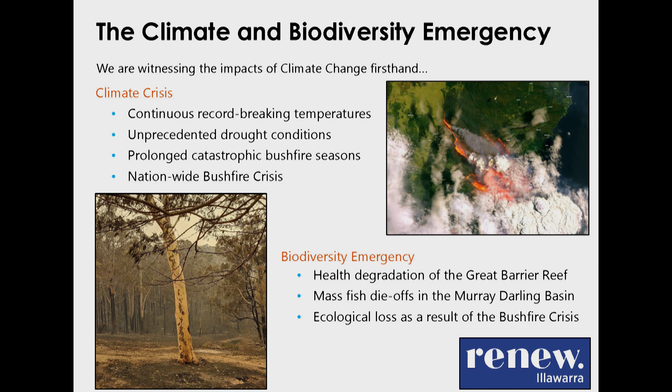So as I said before, last 6 months, a lot of bad stuff happened. Not the funnest recap, so I'm going to keep pushing forward. But the one thing that has come out of all this chaos and everything that's been happening, as I'm sure everybody in this room is well aware of, is the fact that we are getting action, and we're getting action from a ground-up approach.

And so this movement, or this action, or declaring of a climate emergency, is spurring this drive towards net zero carbon emissions and a drive towards a better environment. So it's really, really awesome.

So 92 city councils across Australia have joined in declaring a climate emergency. That statistic has probably changed since I put this down. It goes up a little bit every other week, which is really good.

So pretty much all the state capitals have declared except for Brisbane and Perth. So maybe somehow we can nudge them in the right direction. If anybody has, I doubt anybody's flown that far just to see me tonight, but if you are or know anybody from those states, just get them to push other people in the right direction, that'd be great.

So we've got carbon neutral Adelaide, we've got Sydney, which said let's go net zero emissions 2050, and then they just pushed that right up to date, which is really, really awesome. And a lot of other cities are saying 2050 is actually not good enough, let's do it now, or let's do it within the next year. Because that's the thing, we have the technology to do it now. We just need the driver and the motivation.

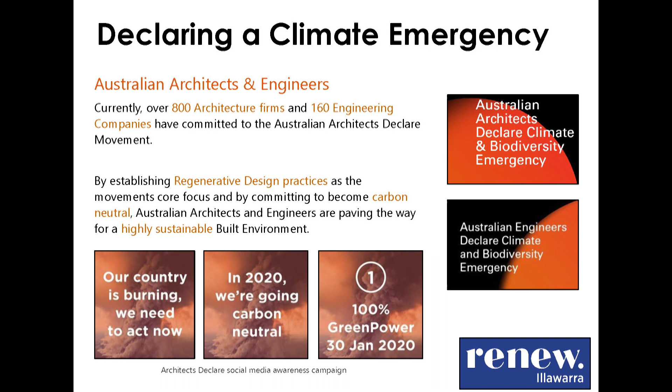Okay, so before we go down the road of telling you how to design your home to be carbon neutral, I think it's really important first that we break down carbon neutrality to understand what we're talking about tonight.

So when we're breaking down carbon emissions, there's a lot to unpack. It's a big umbrella: total carbon, embodied carbon, operational carbon. Operational carbon is what's produced from my actions - like this building right now, we're using energy that's a bit carbon-based, a little bit renewables-based, but mostly carbon-based electricity from the grid. But we also drive cars, we also like to fly and go on trips and stuff like that.

And then we have embodied energy. Embodied energy is what makes up the things around us, and the energy that goes into making those things. So within buildings, we're talking about construction and the embodied energy of construction and materials. This is another factor that, only in the last probably about 4 months, has seen more efficient methods of recognizing embodied energy within the built environment, how to calculate it - that's only just come to fruition.

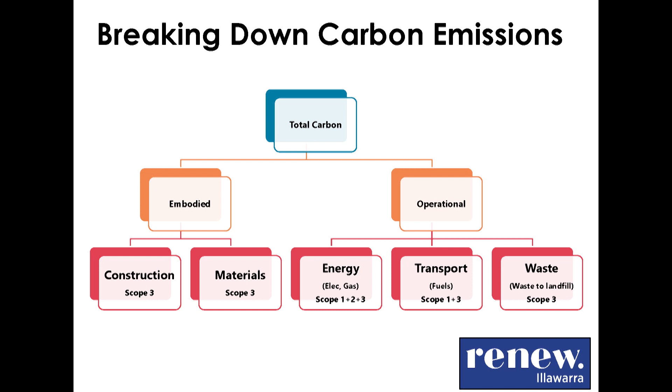So it's a really complicated process when you're designing a building to minimize your embodied carbon, or to calculate that. It is getting there, but operational energy is a lot easier to quantify. So those are under the umbrella construction and materials under embodied energy, and then energy, transport and waste under operational energy. Minimizing those things, or understanding how you can minimize them, is how you can become carbon neutral.

Don't want to get ahead of myself. So, breaking down carbon emissions - and I apologize, this one is a little bit commercial based, didn't have time to change it. So again, this is looking at the different scopes: you've got direct emissions, indirect emissions.

Indirect emissions come from embodied energy, from the things that go into building your home. If you're looking at glazing or insulation, concrete or wood, and all these other materials, they have different amounts of energy that goes into producing them. So we need to get away from materials that are produced with a lot of energy, and look at other items, like instead of concrete, hempcrete. I think building designer Dick Clarke talked about hempcrete here before, which is really good - it's a concrete that has lower embodied energy than normal concrete.

But also looking at the rise of using timber - timber in houses, but timber in tall buildings as well, which has lower embodied carbon than steel. So that's how we're looking at those embodied energies.

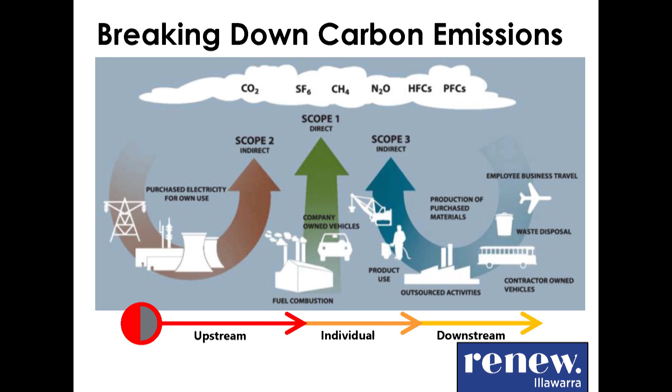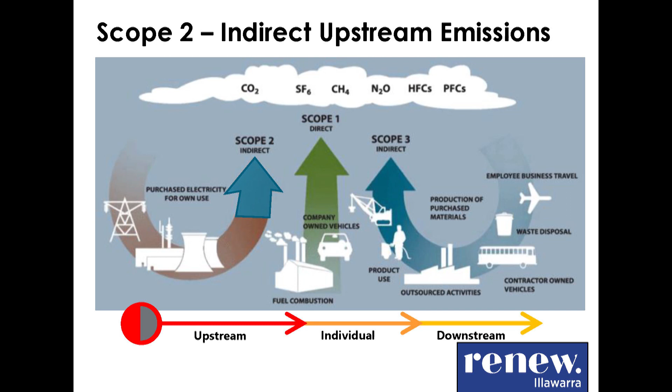But tonight, we're just going to be looking at scope 2, which is the indirect emissions that come from our grid, and how we can minimize our energy consumption from the grid to obviously become net zero carbon. But also then we're going to look past that and look at how we can generate our own electricity as well. And then through regenerative design, we're going to look at what happens once you've achieved carbon neutrality, what's beyond that.

So how can we achieve net zero carbon emissions? The first thing is measuring, then we want to reduce, then we want to offset. So we need to understand the quantity that we want to reduce our emissions to. We need to understand how to measure and quantify our electricity so we can reduce it. And once we've got it down to a realistic level, we then look at offsetting it.

So some buildings, like the Sustainable Building Research Centre, can produce all of its own electricity on site, so it doesn't need to offset. But if you've got a little home that doesn't have much space for solar PV on the roof, and you've got a large tree, or you're behind towards Mount Keira or something like that, and you've got a lot of overshadowing, you might have to offset. It's also, when we look at renting, or renters, the other way that we can become carbon neutral is through offsetting.

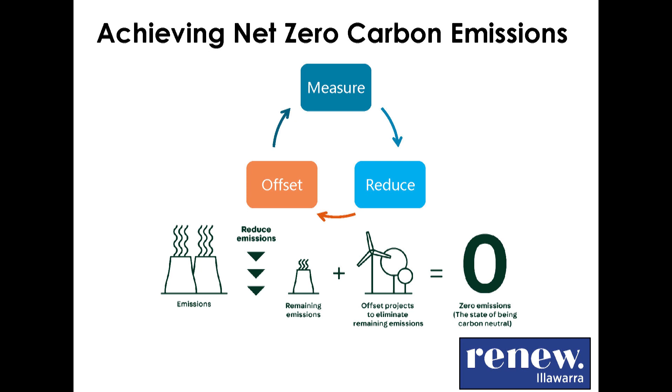And then we're looking at the core foundation of that when you're building a new home: the site. If you have the opportunity - it's very rare that some people have the opportunity to build or optimize their site - but understanding how you want to position your home, utilizing the shape and orientation of the site to facilitate passive cooling and heating. So that's obviously trying to look at ways to have your...

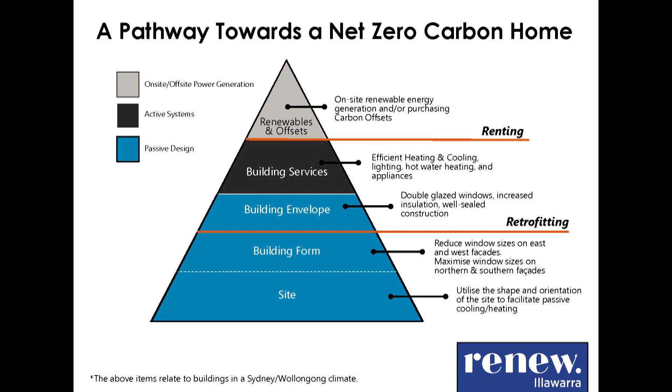So that's a pretty big overview. There's a lot more detail you can go into, but this is just a little bit more detail on what I was talking about before.

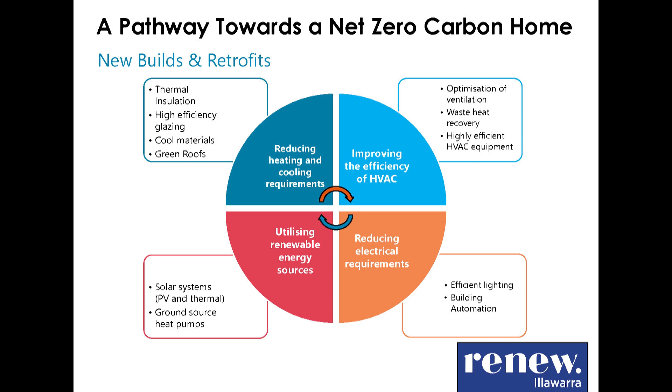As a homeowner and a renter, if you've done all the above and you're optimising your home the way you can, as we stated before, we can achieve carbon neutrality through minimising electricity consumption, advocating for installation of solar PV, etc. But the main thing you can do, and people are understanding this and more people are driving this, is moving away from places where you put your money that support coal-based infrastructure - moving away from energy providers that support the fossil fuel industry.

There's a couple of names there, dubbed the Dirty Three. Instead, move to an energy provider that acknowledges and supports climate change action, looks at community energy programs, and has sustainable carbon offsetting programs like reforestry and investing in solar farms.

So the two main ones there are PowerShop and Enova Energy. PowerShop's a bit of a bigger guy, New Zealand based - all their assets are hydroelectric dams and wind farms, and I think some solar in there as well. Then you've got Enova Energy, which is a bit of a smaller guy and really supports community renewable projects. So those are the two to go with if you want to hit these bigger companies in the pocket where it hurts the most.

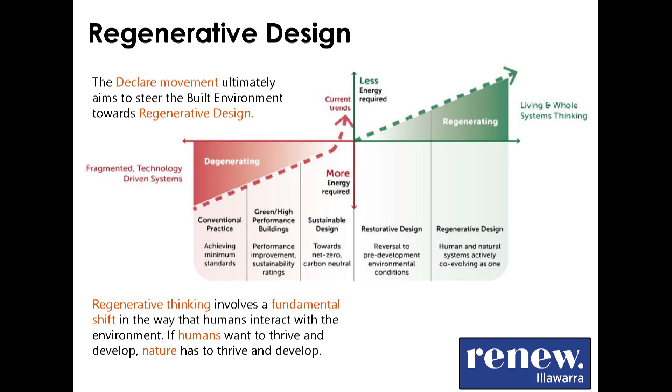Within regenerative design, this great graph is really benchmarking those standards and looking at the construction codes and practices we should be using. We do have to use all of them, it's a bit of a tier. So if you're building a home, you have to register it with BASIX - the Building Sustainability Index rating - and then NatHERS sits under that.

That's the minimum compliance requirement you have to do to get your home approved. But if you're designing your home, something you're going to live in for 30 years, or if we've got a whole estate, or a multi-residential apartment building, like an aged care unit with 3 blocks and 200 people living there, we don't want to just be building things for minimum compliance. For me, minimum compliance is one step away from breaking the law. We want to do better than that, we should do better than that as well.

The next step up from that is green buildings, or Green Star. Green Star is awesome, and it's now tracking towards this break-even, net zero carbon kind of approach. They're really pushing for that. Today there was a bit of a sneak preview at the Green Building Council of Australia about green homes for residential buildings. At the moment, Green Star just looks at commercial, and a couple of other things like railway stations even, but not residential dwellings.